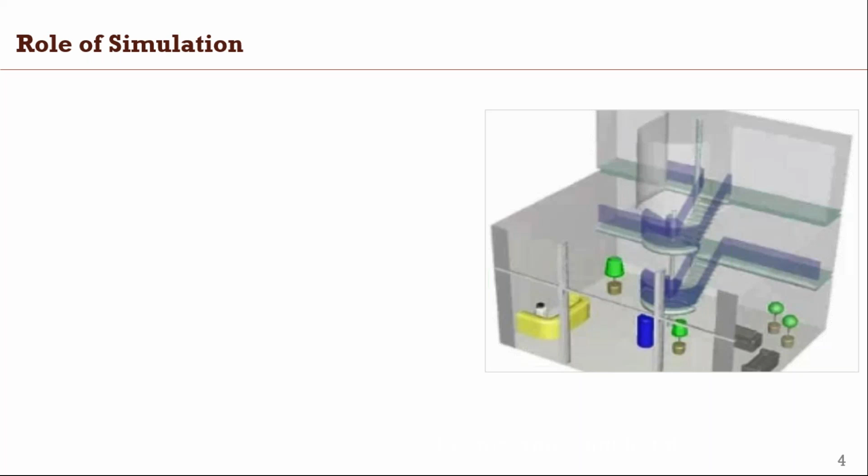So if you can see from the figure, there is a room in which a fire breaks out because of some reason, and everywhere there is smoke.

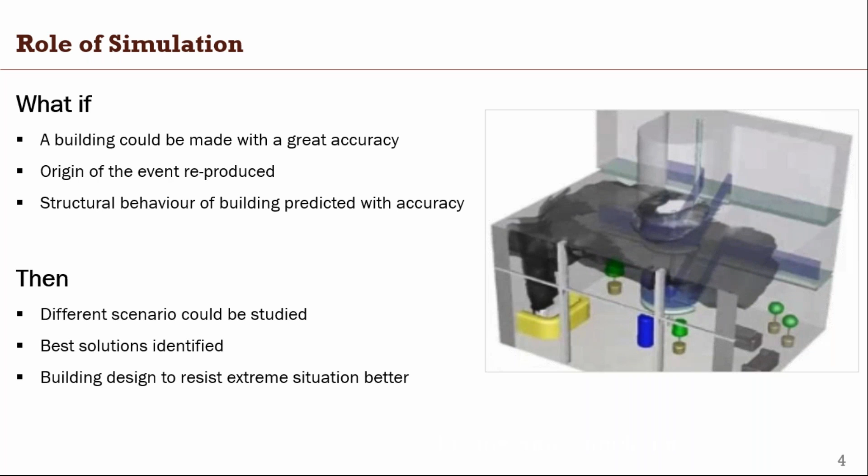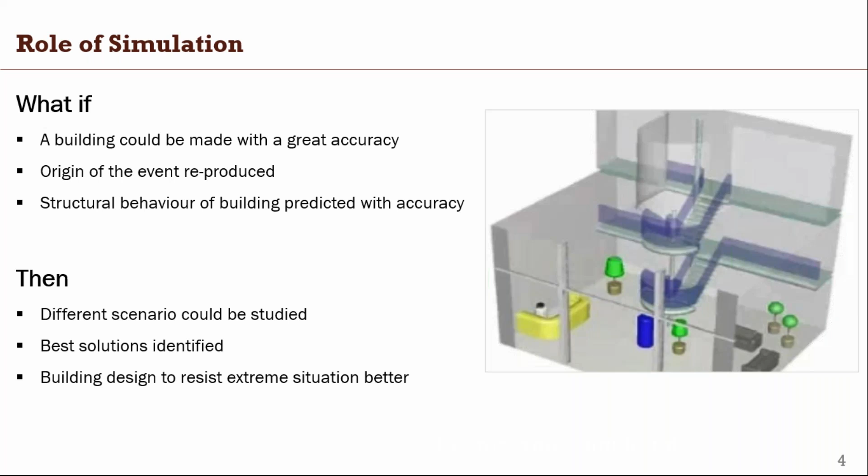So what if a building could be made with great accuracy, and the origin of the event reproduced and structural behavior of building predicted with accuracy? If this can be done, then different scenarios could be studied, best solution identified, and building designed to resist extreme situations better. This could be done only with engineering simulation. So that's the role of simulation in our life.

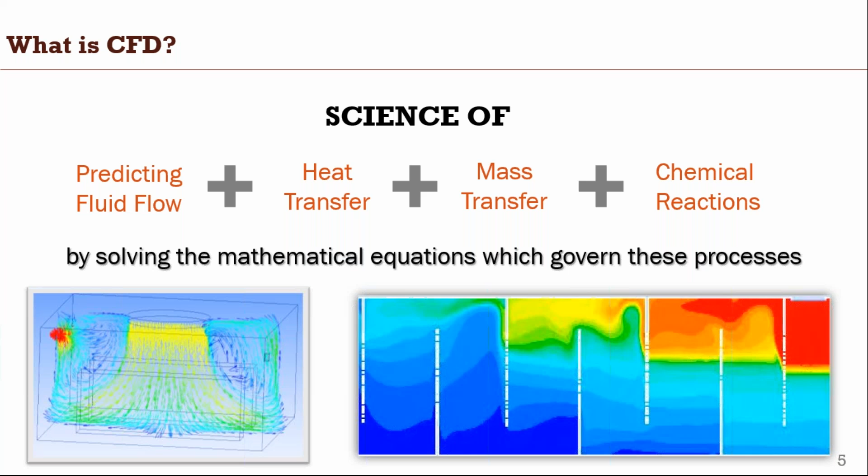So what is CFD? CFD is basically a science of predicting fluid flow, heat transfer, mass transfer equations, chemical reactions, and all of these equations we solve the mathematical equations which govern these processes, and that's what CFD is. I'm not going into technical details, but CFD is a virtual experiment.

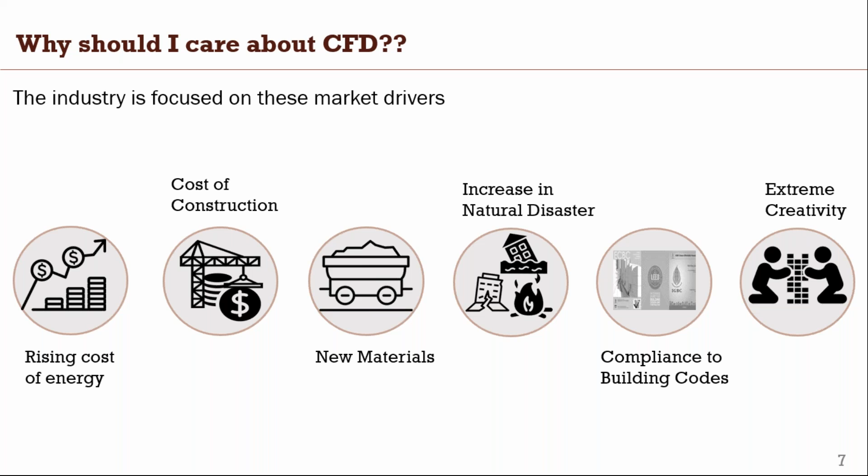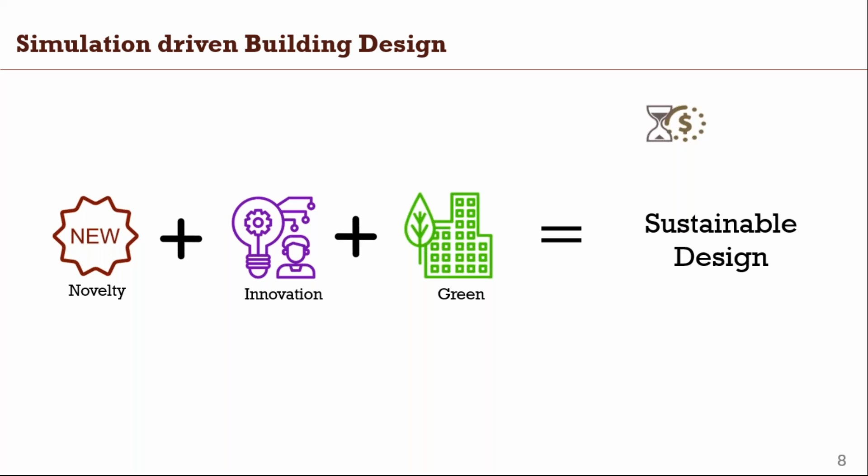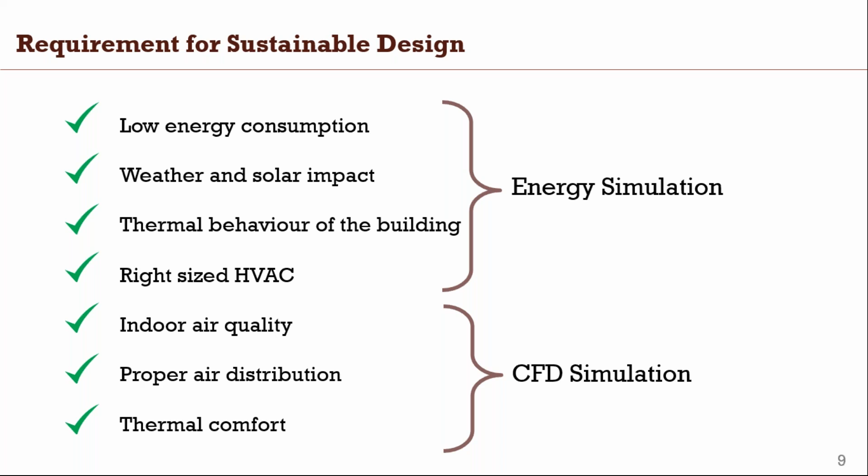So what is the requirement for sustainable design? Low energy consumption, weather and solar impact, thermal behavior of the building, right sizing of HVAC. These four factors can be covered with energy simulation, but the other three - indoor air quality, proper air distribution, and thermal comfort of the building - these three factors can only be catered with the help of CFD simulation.

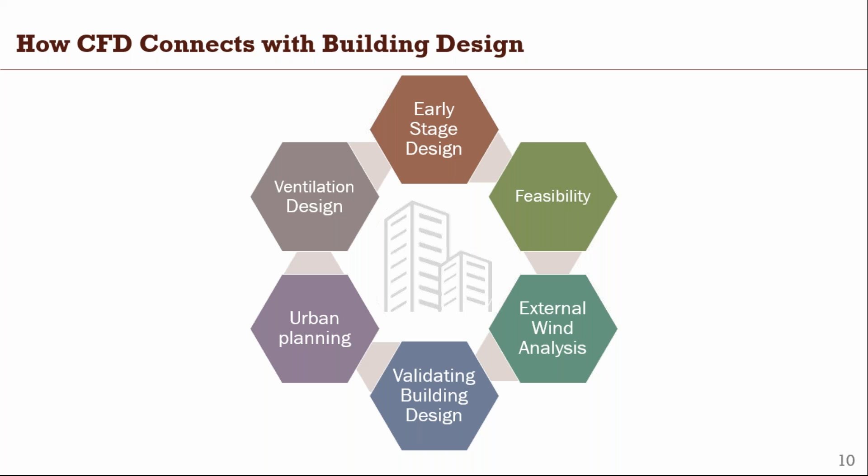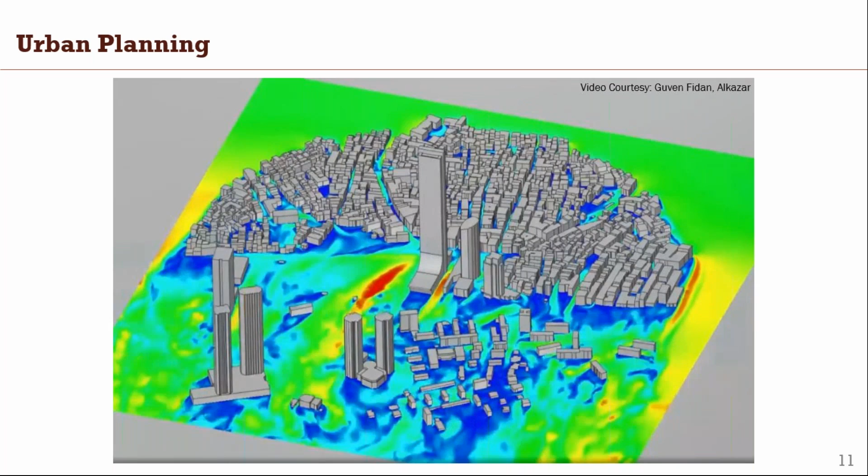So I'll take an example of urban planning. If you can see the video, this is a real example of a city situated in Israel. There are few corners where very fast wind drags you - it literally drags you from one place to another place in winter season. And plus there are some chilly winds that come from the north.

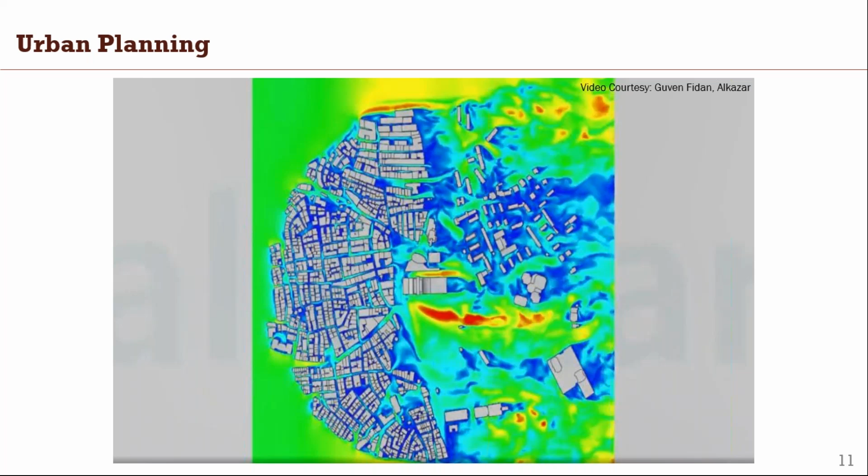So the impact of wind is undeniable, but the height of the tower is also an important factor to increase the wind velocity, as can be seen from the figure. The city planners are working to come up with a solution, but over time they have learned that acceptance is the most important parameter for this kind of planning. So that's where CFD plays a major role in urban planning.

So early stage design is one of the processes. Right now, if I'm talking about a few years before, 10 years before, the design process was traditional, where all the architects and engineer community had typical thinking, and once the drawing had been finalized, then the engineer got the design and started the work. But right now the integrated design process is coming, which collaborates architects and engineers up to a level, so that some design changes can be performed before the design is finalized.

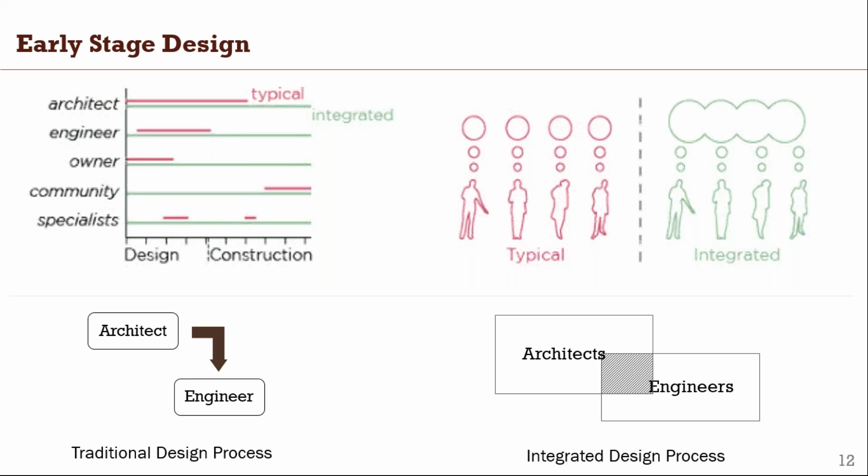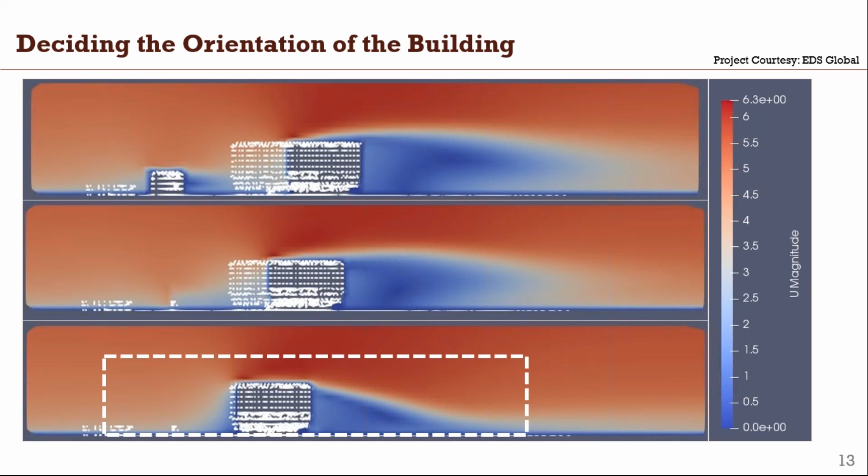So one example of this is deciding the orientation of the building. You can see these three figures - the orientation of the building has been changed and the CFD simulation has been done. If you can see the last image, the wind pressure is very less for this orientation compared to the other two buildings, so the pedestrian will feel less draft of the air near the building. So this is how CFD helped decide the orientation of the building.

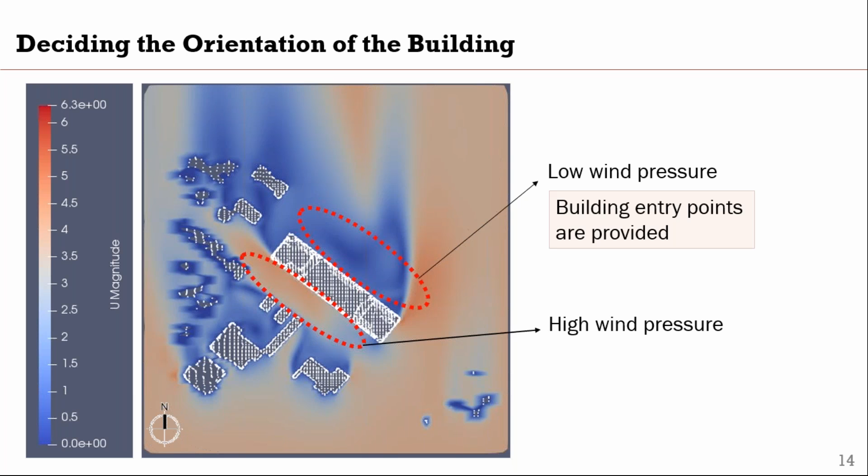So again, in this, after CFD simulation, it has been found that there is a high wind pressure. Basically in the real scenario, this is a road and this is where the entry of the building was expected. But after simulation, it was found that there is high wind pressure in this area and low wind pressure in the back side of the building. So some design changes were implemented - where the low wind pressure was, building entry points were provided, and for the high wind pressure, a tree buffer can be provided to reduce the effect of the wind.

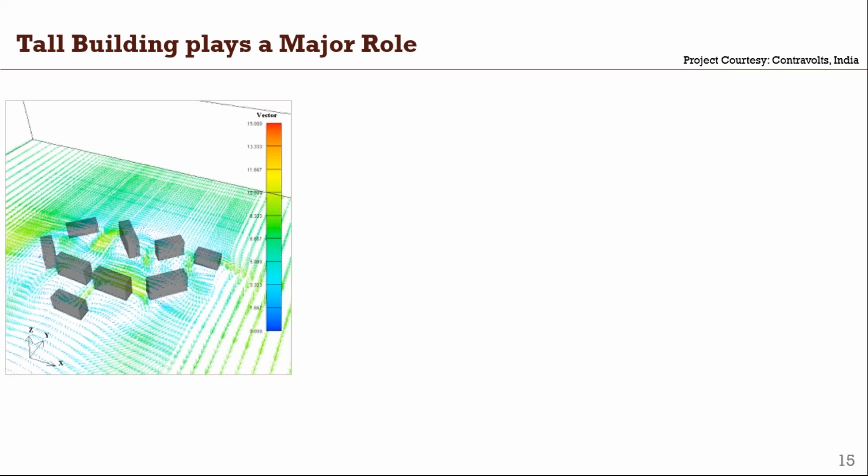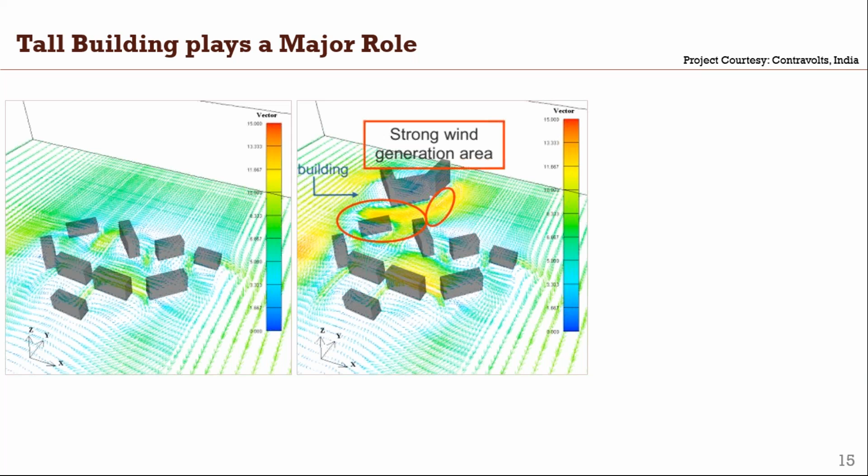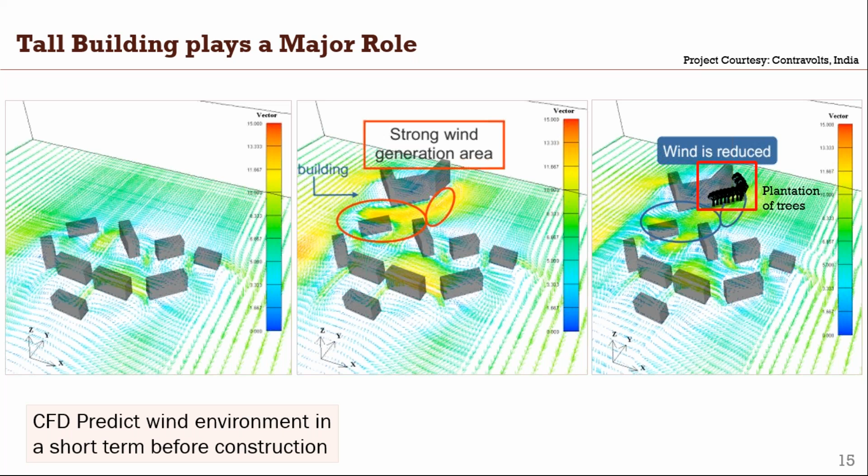CFD can also play a major role in building design for naturally ventilated buildings with comfort and proper ventilation. A building was studied with different natural ventilation strategies like single side ventilation and cross ventilation to study the effect and finalize the location of the window.

You can see the CFD model. This building had 4 floors and is a residential complex. A sandwich structure of the floor has been studied because of the symmetry.

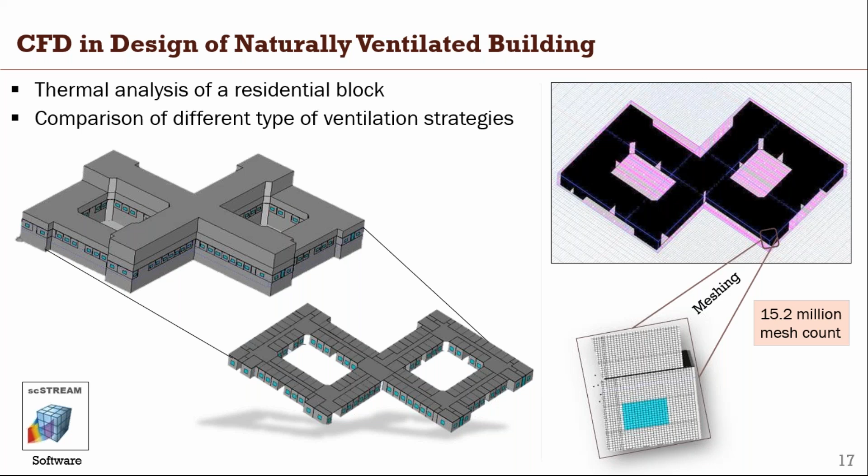These are the temperature representations for two different cases. The left one is single side ventilation while the right one is cross ventilation. The right hand figure has better ventilation compared to the other because of the proper flow of air from one side to another.

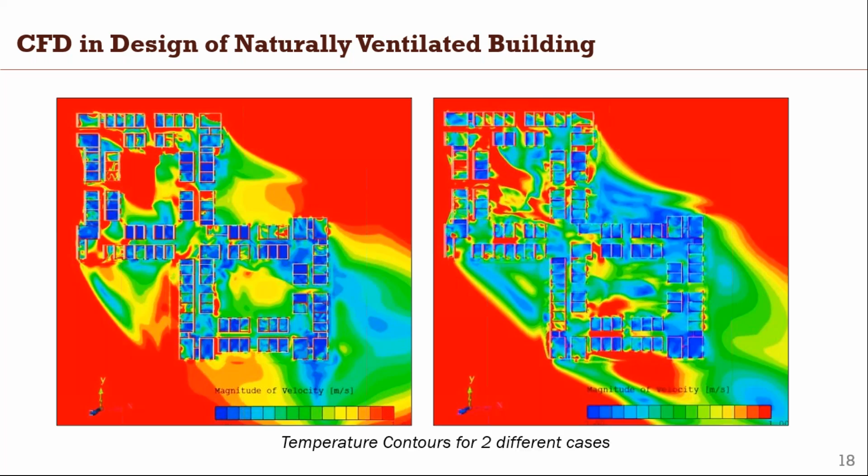This is the velocity vector for single side ventilation on the left. CFD predicts the location of windows for maximum air change in less time. On the right, cross ventilation is happening where the window height and position is finalized after iterations to check the maximum airflow or maximum ACH. That's where CFD can help in natural ventilation design.

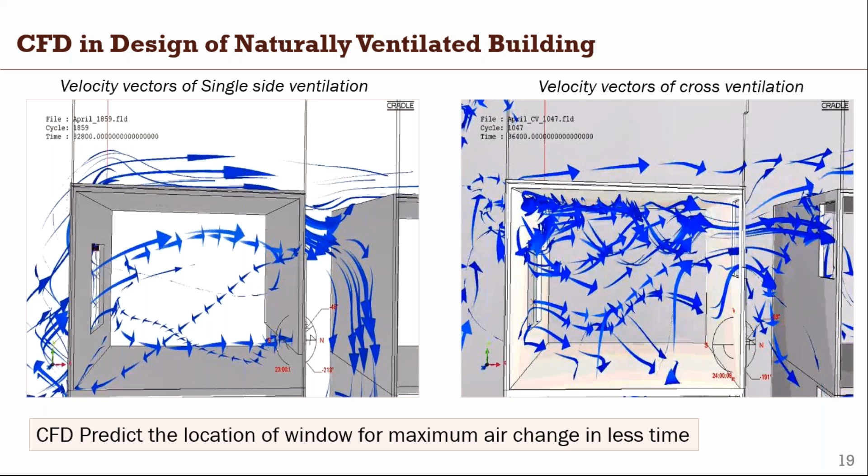An integrated approach shows how decisions can be made. For identification of cold and hot spots, the CFD simulation expert tells the architect where these spots are, so the architect can plant a tree or add water bodies near it to reduce the urban heat island effect and reduce the cold or hot spot.

Another factor is wind impact on pedestrians. If the wind is too low or too high, the architect can change the orientation, and if planning for the city, he can change the building orientation and location to have a good impact on pedestrians.

Wind impact on tall buildings is a factor usually ignored, but if a building is very tall and wind is very high, the impact on top floors is significant. If we can simulate this, a stable structure to withstand the wind pressure can be provided on the top floors. It also helps in natural ventilation, so window placement can be changed accordingly to check the ACH. That's where building design works.

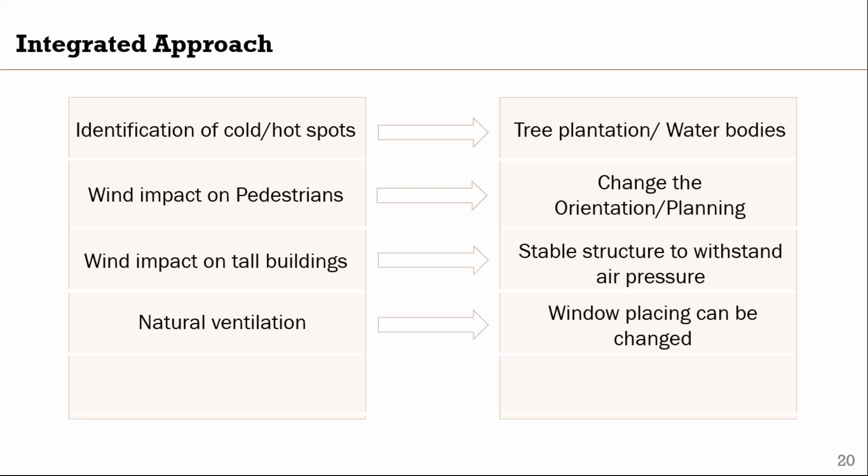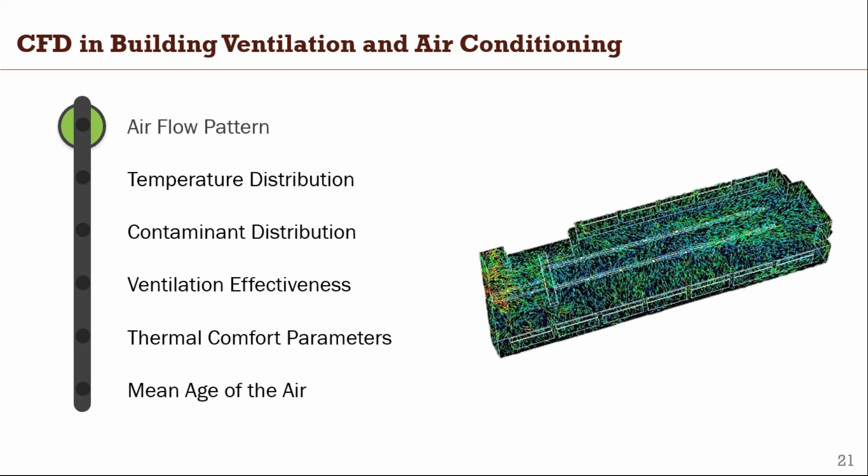Now CFD also works for building ventilation and air conditioning, or you can say in the built environment. There are several factors in which CFD can play a major role. First is airflow pattern, which I'm explaining with case studies.

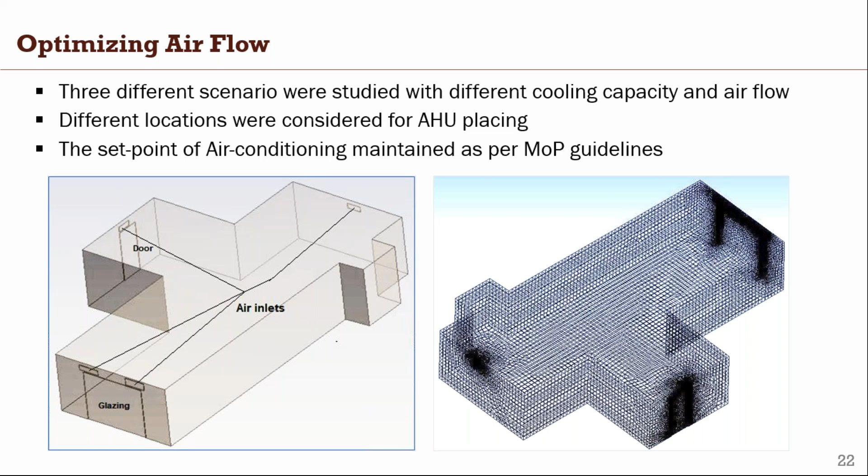For airflow pattern, you can optimize airflow. This is a room or hall of a house. Three different scenarios were studied with different cooling capacity and airflow to optimize it. Different locations were considered for the AHU, and the set point of air conditioning maintained as per MOP guidelines, which is 24 degrees. These are the three cases showing temperature contours.

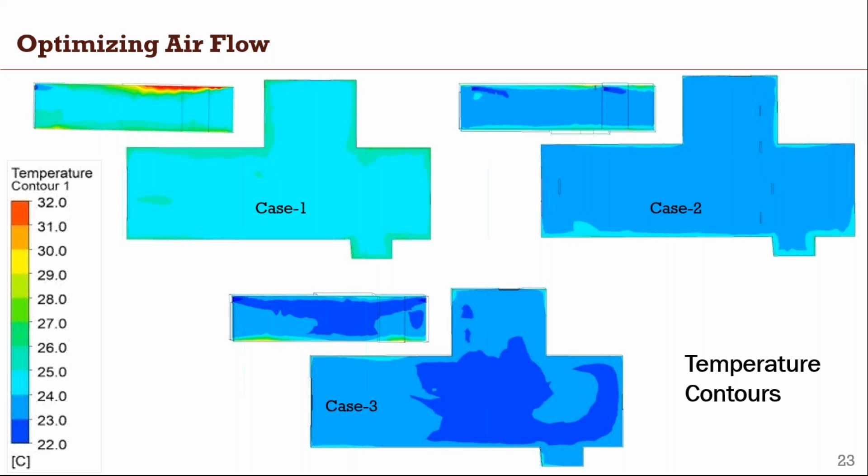In the first case, temperature varies around 24 to 25 degrees, while in cases 2 and 3 it's less, as I'll show in the next slide. This is the air velocity vector. In case 1 there are 4 diffusers from which velocity is flowing.

In case 2, the location of the diffuser has been changed, and you can see the effect. In another case, the diffuser's location and number of diffusers have been changed.

Case 3 has the lowest airflow speed at 1 meter height level, which is the standard height, so the occupant does not feel cold or any draft of cold air. So case 3 was the best possible case for optimizing the airflow for occupant comfort.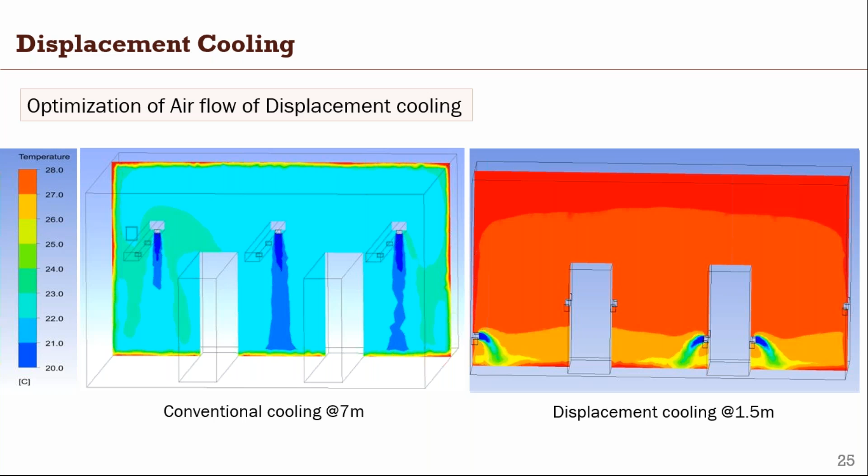Different scenarios were considered with reducing the airflow rates. We can see these are the different airflow velocities varying from 1 meter per second, then 0.8, 0.6, 0.4, and even 0.2. This is a representation of the airflow for different cases.

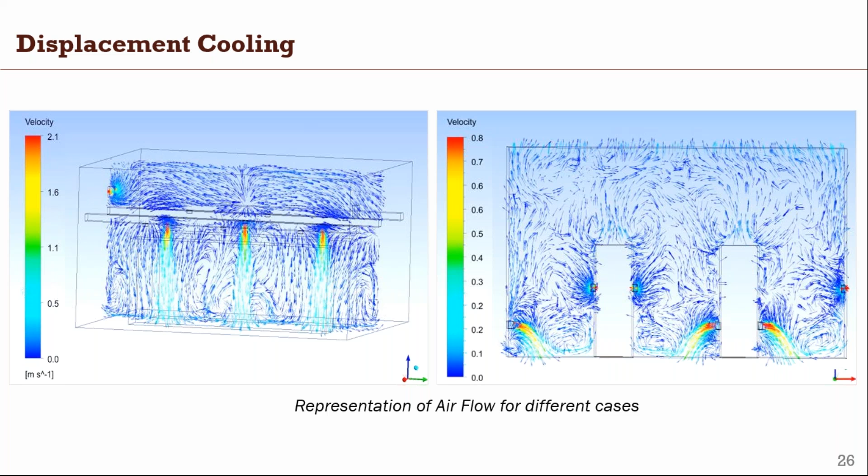It has been found that if 1 meter per second velocity is flowing through the displacement cooling, then the occupant will feel draft. I'm not showing all of the results here, but you can see from the video that the supply duct is at 7 meter and the standard velocity is 2 meter per second.

The second case is 0.8 meter per second. So in general, it's a model of a store, a supermarket store. Generally at the upper height we don't require cooling, but in conventional cooling the complete room gets cooled, so there is a wastage of energy. That's why we use displacement cooling, where only the adequate height, like 2 meter or 3 meter, gets cooled, and the upper portion doesn't require cooling. So that's where displacement cooling works.

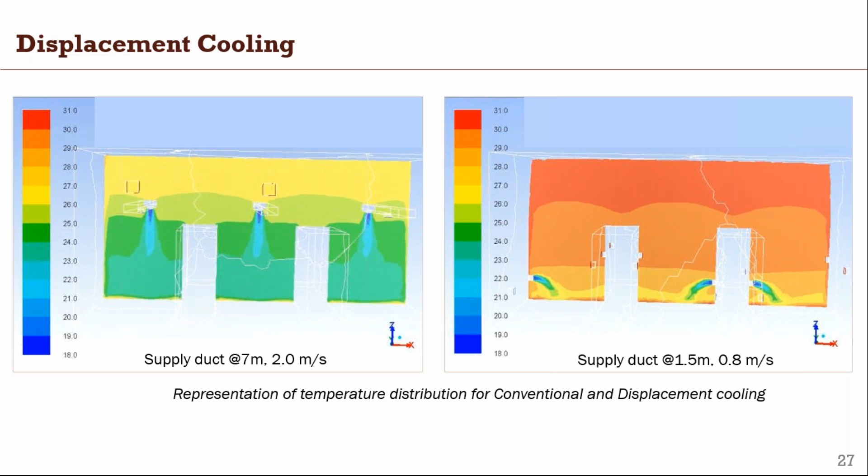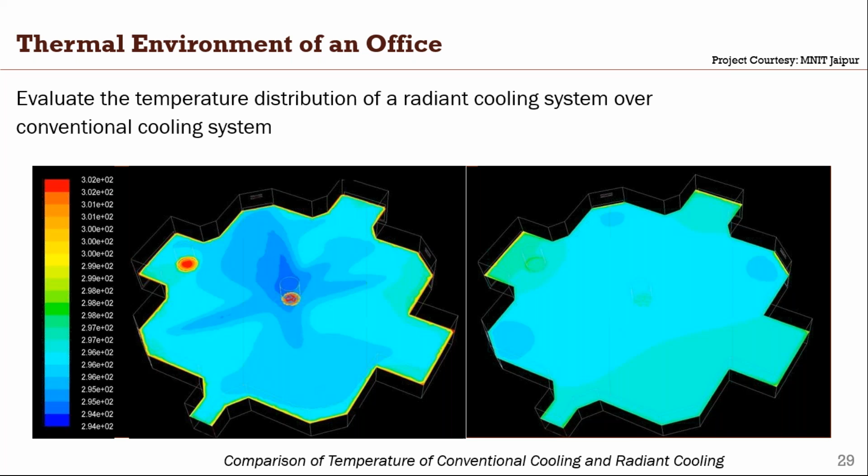So the spatial distribution of temperature for both cases has been determined. Spatial distribution is basically air temperature according to height. You can see for the conventional case, the distribution is more scattered in range, but for radiant cooling, the mean air temperature range was within comfortable limits. So we can say that with this kind of cooling, meaning radiant cooling, with this temperature and this airflow, people will feel more comfortable.

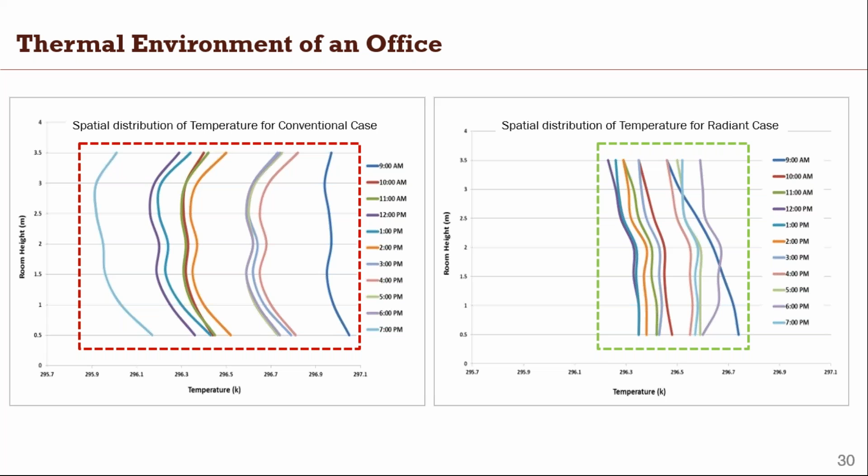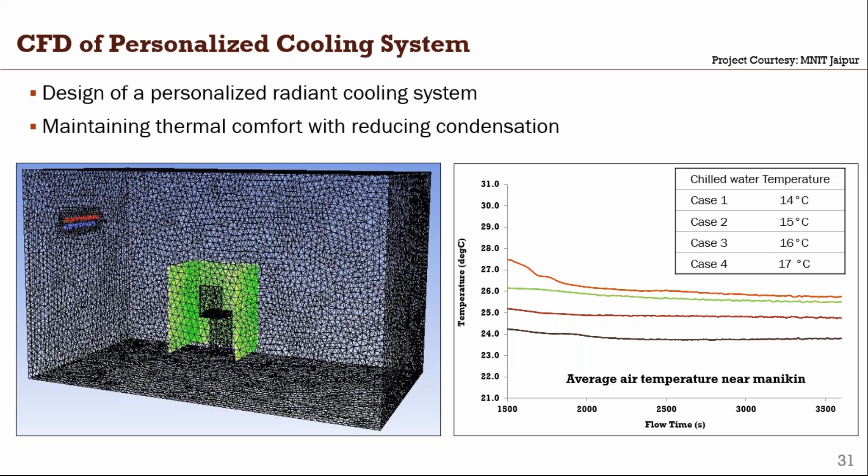These are some temperature representations, and from the temperature data it was found that the chilled water temperature for this personalized radiant cooling system can be increased up to 16 degrees centigrade. In conventional cooling, it's around 7 to 8 degrees. So there is a lot of delta T, and thus savings can be achieved.

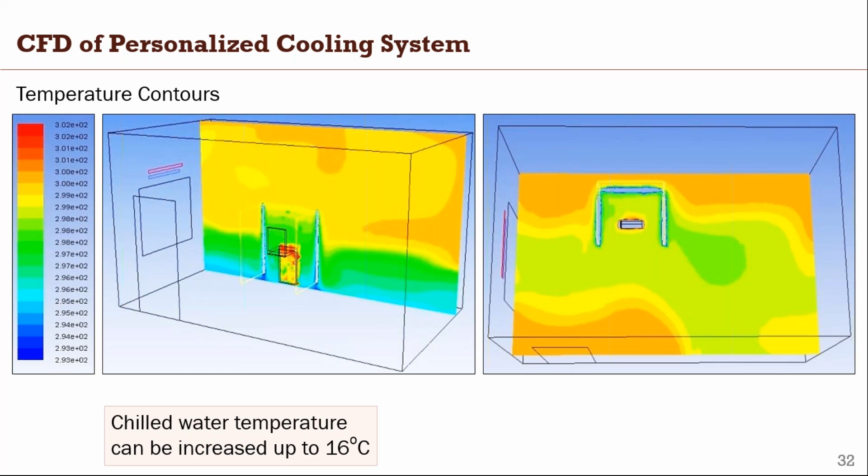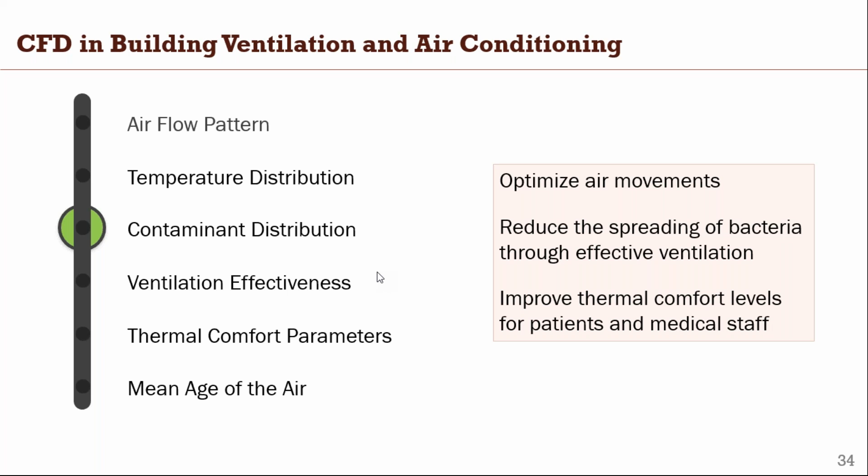So what can CFD do in a healthcare facility? It can simulate dust contamination. There are two cases, one with a single diffuser and one with 4 diffusers in a doctor's room. This simulation has been performed at human height, 30 seconds after door closure. So this is the dust concentration after 30 seconds.

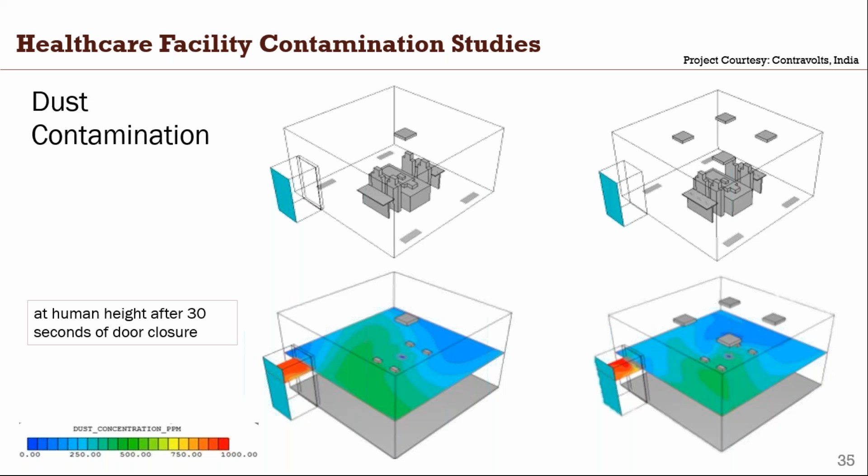Another case is viral contamination from a patient. This can also be simulated through CFD, and you can see the results at the center of the patient's body after 30 seconds of door closure. You can see that option 1, with only one diffuser, is better in this case, because in the other case the diffuser is placed just above the head of the person sitting there.

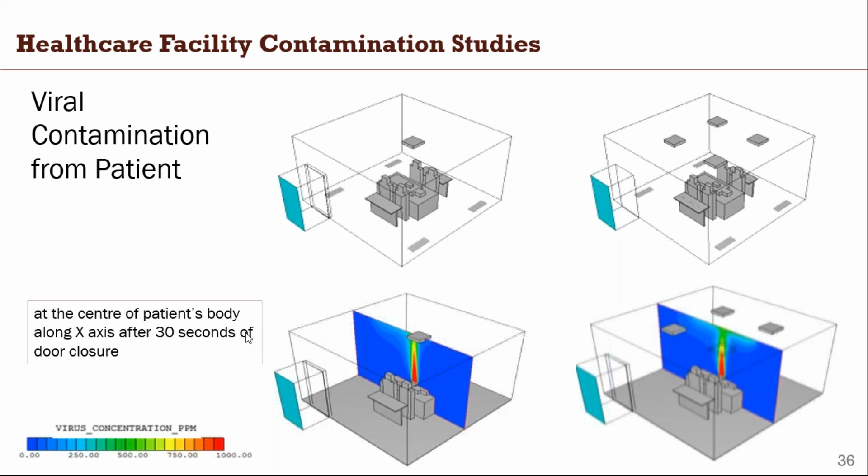Skin flake contamination can also be studied with CFD. Skin flakes are basically particles that can be removed if a person is sick or has some condition. So this type of simulation can also be done.

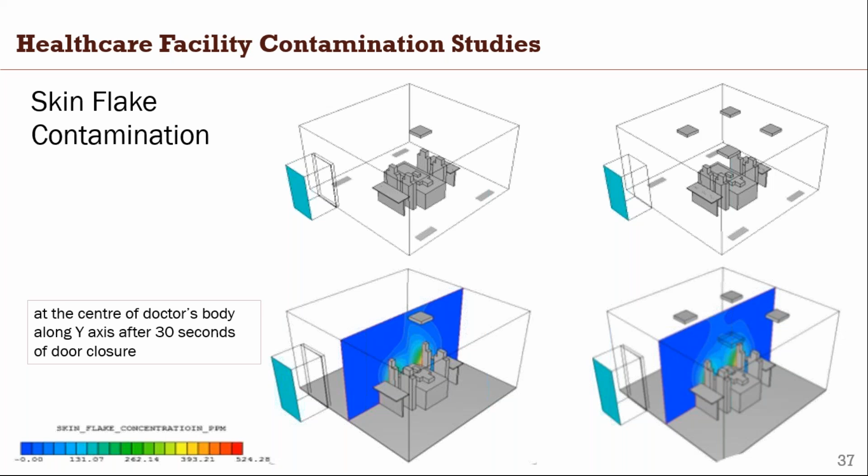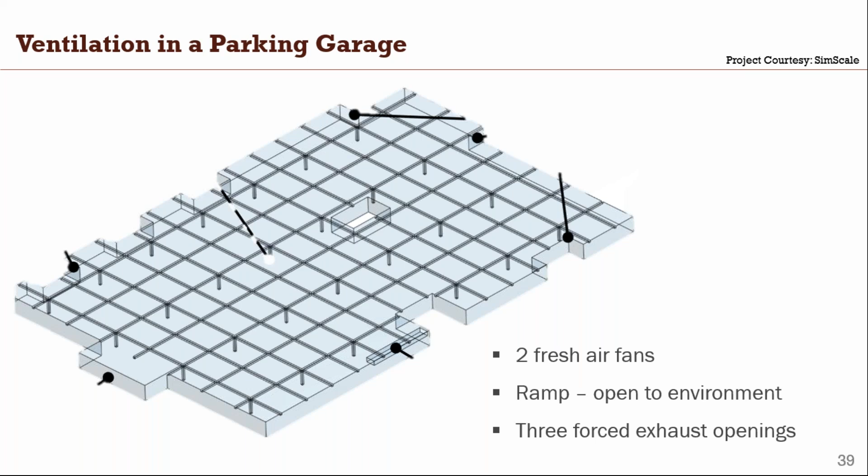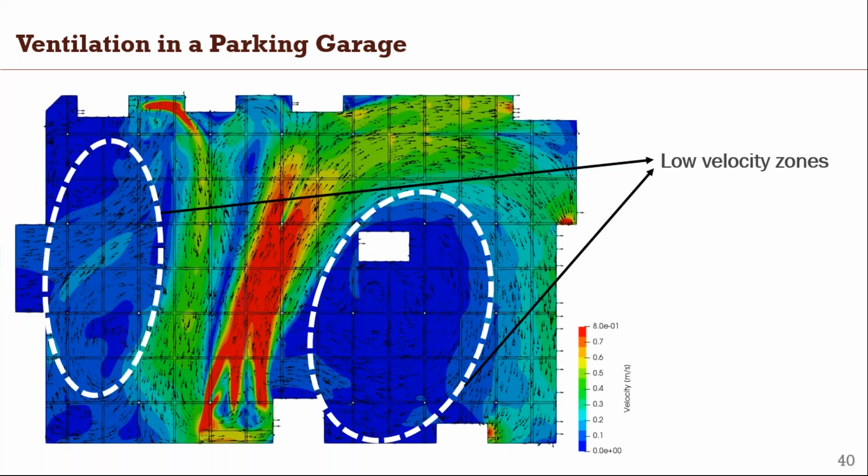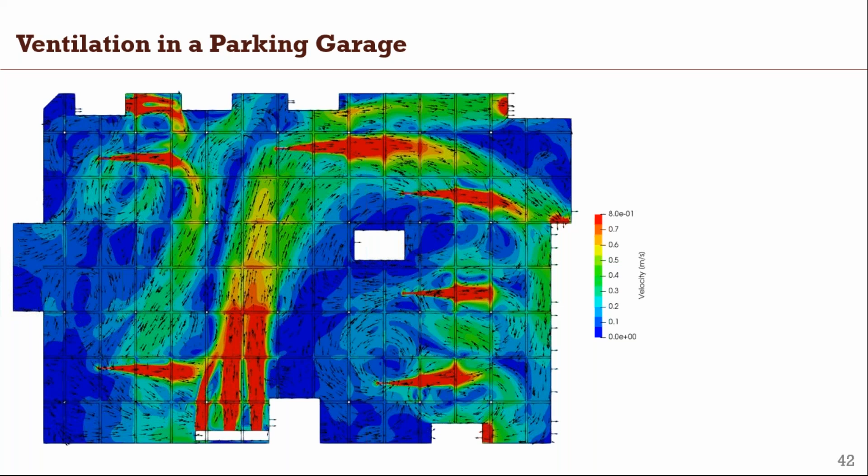Ventilation effectiveness is another major parameter. This is a case of ventilation in a parking garage, where we have installed two fresh air fans, one ramp open to the environment, and 3 exhausts. We did the CFD study and you can clearly see two low velocity zones, where air is not flowing properly. To increase the velocity distribution, we placed jet fans at different angles and distances, and now the airflow velocity has improved compared to before. That's how ventilation in a garage works.

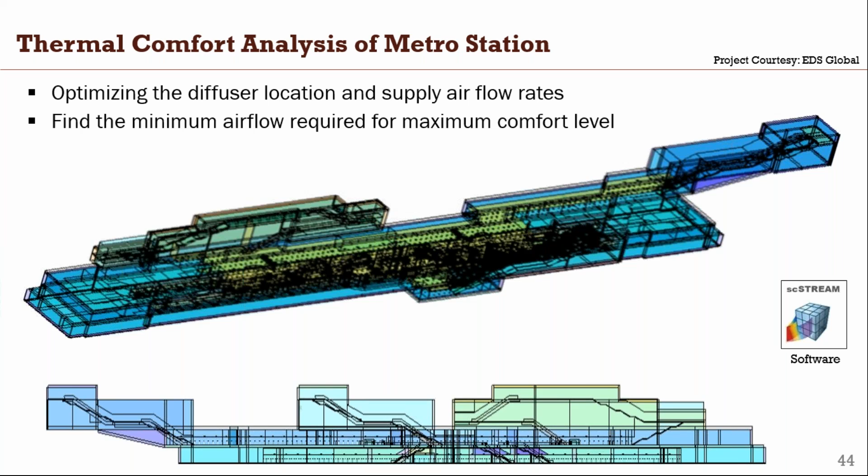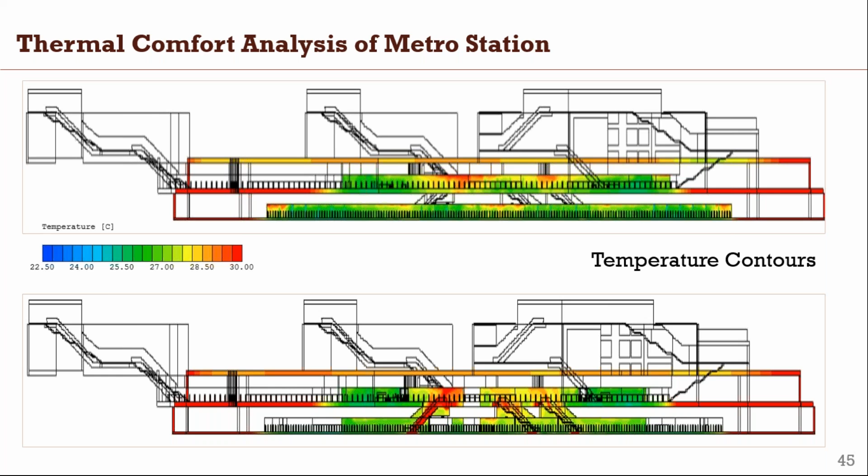Here you can see the temperature contours of the whole building. It's not very easy to understand since I've shown the contour for the whole area, but it gives some idea. This is the airflow velocity vector, showing the path of the air in a section representation of the station.

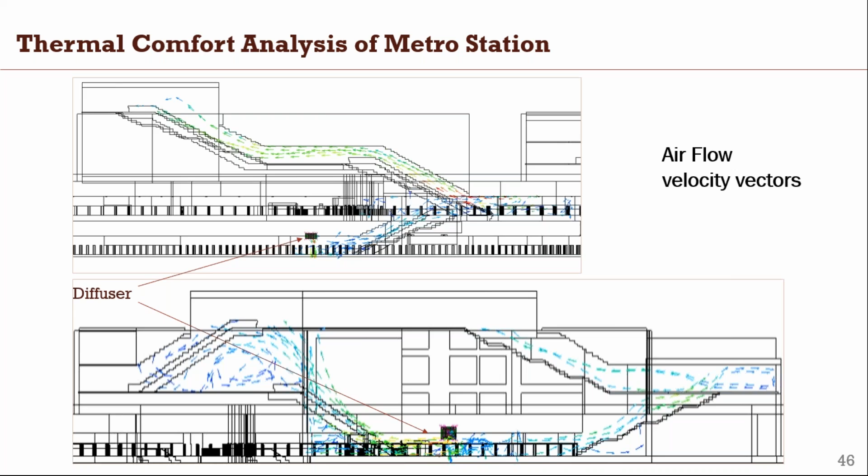The important part is PMV and PPD. This is a PMV contour. The airflow and diffuser locations have been optimized so that the PMV level is maintained within the thermal comfort limit, for both the concourse and platform levels. The black dots you see represent the people considered for the simulation.

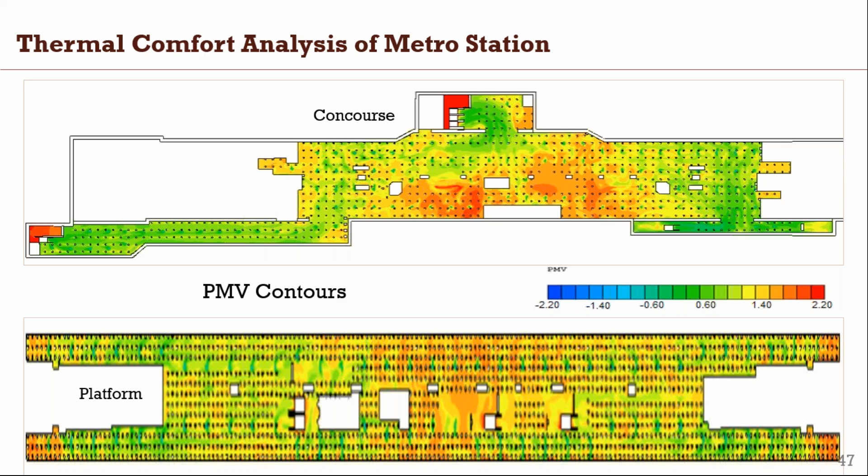Last one: mean age of air, which can be found from CFD. Mean age is a significant indicator of the freshness of air in a room, showing how air coming from outside is changing over time. It is very important in hospitals and ICU facilities, so that fresh air can circulate as quickly as possible. It's also required in natural ventilation studies, and if it's forced ventilation, you can find the air change per hour and select your options accordingly.

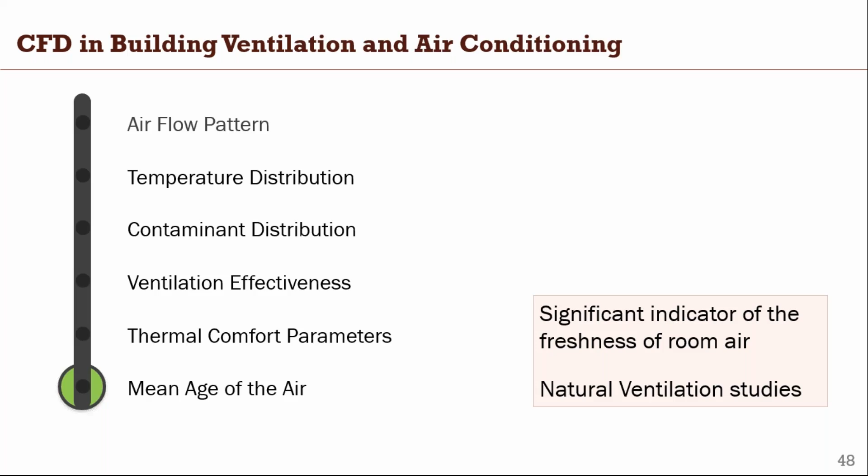So these were some case studies which showed how CFD can help in the decision making process in building design and HVAC design for built environment.

Now I want to show some basic fundamentals of CFD, including the steps and some best practices which should be performed for simulation. So basically the CFD process simulation.

First one is problem formulation, where you first gather the information: what kind of CFD you want, internal or external, or the parameters. Then is your flow turbulent or laminar? What are the specific goals to your problem? What do you want to achieve? So that's the first step of CFD process, which is formulation.

The second is mathematical formulation or equation, in which you decide the flow model, the turbulence model, whether it will be RANS, K omega, or K epsilon, depending on the properties you want to simulate. And the computational domain or the boundary of your domain. So you have to decide first what will be your domain boundary. And governing equations like mass, momentum, energy - CFD works on these three equations.

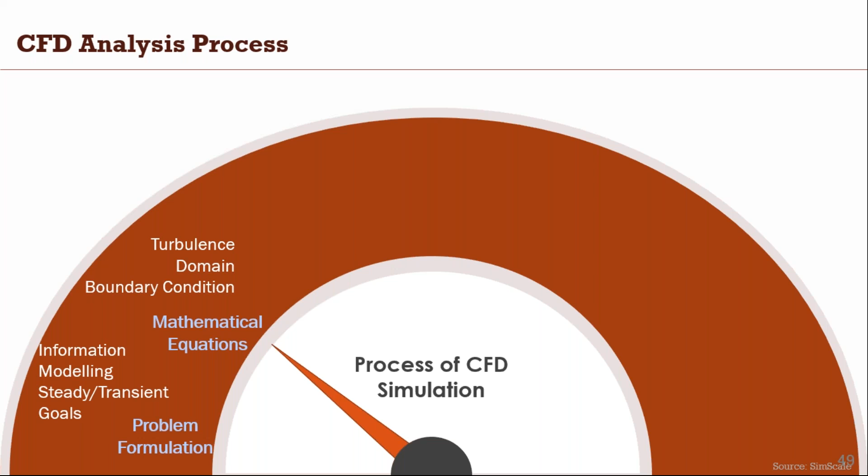And then you can simplify your equations - if you are doing some simulation and the results can be seen from the 2D simulation, then you need not do a 3D simulation, which takes more time. So you have to decide the second step.

Third one is discretization. Discretization is basically meshing of the object. Meshing plays a very important role in CFD. I will cover it later.

And the pressure velocity coupling - how it couples with the pressure and velocity, which model you are using, like which approach - FDM or FVM. This approach decides which software you should go with. And the time scheme, whether it's explicit or implicit.

Another step is iterative solution, where you see the method of convergence, the equation balancing - how the equation can balance - and you give input to the solver, and there are some factors which can be ignored in some kinds of simulation. I'm covering very basic detail. I'm not going very much into it, so just keep it with me.

Next step is simulation run. So you have to decide the time step and the maximum iteration in a time step to reduce errors, so that your result can be quick and accurate.

Next one is post processing, which is also important, like contours or animations - how you represent the results.

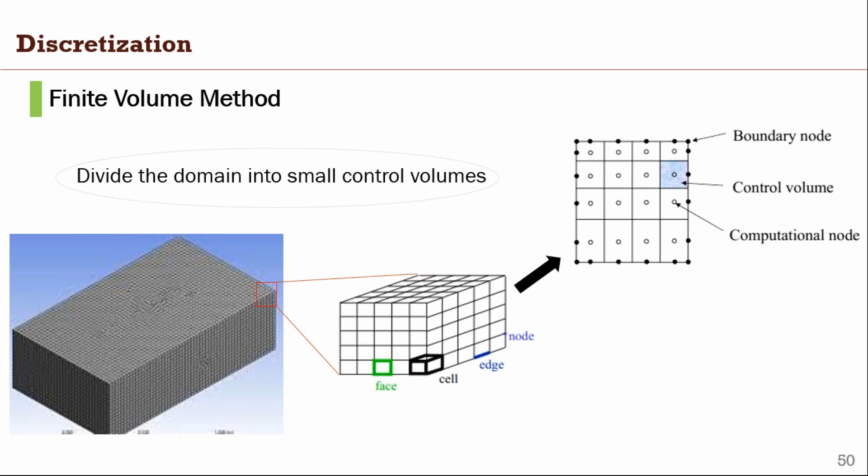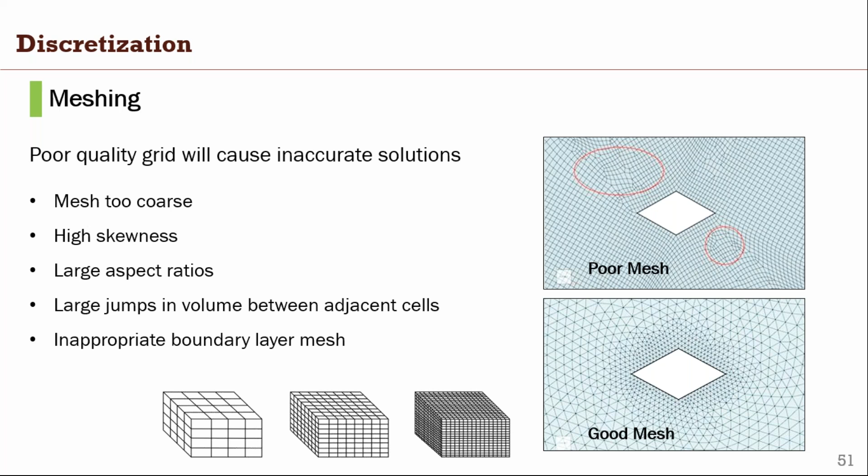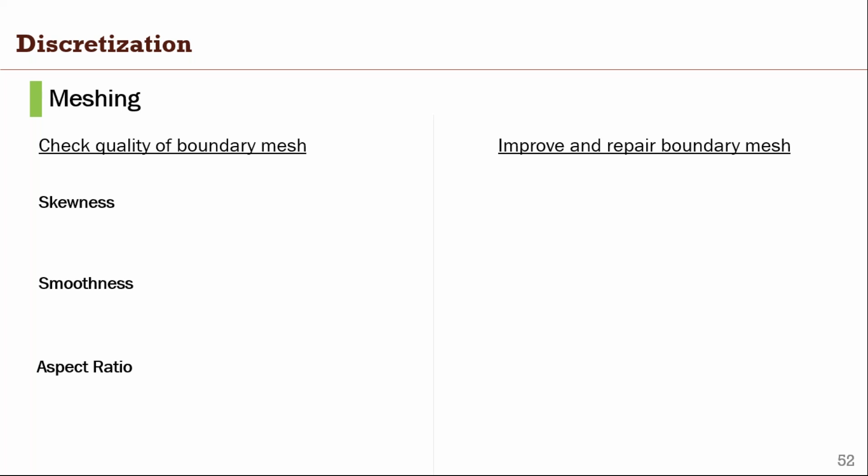Skewness is how the mesh is skewed from the corners or where the geometry is uneven. If your skewness is towards 0, then it will be best. But generally, if you try to reduce the skewness, then your number of cells increases a lot.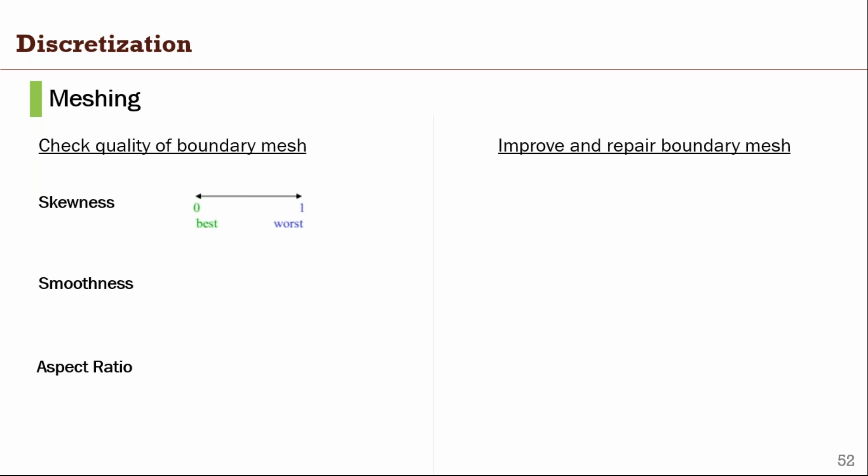So try to keep it towards 0, but it's not mandatory. Smoothness is the change in cell size, how the cell size is changing. If there is a large jump in cell size, the CFD simulation will show error or the result will not be accurate. So there should be a uniform growth rate.

Sometimes the domain is too large and we don't need refined cells. For example, in external CFD, the domain is very large. We take an environment as a domain with some 100 meter or 150 meter from above and left or right side. So it's not required to have a very refined mesh because this is of no use. You can increase the mesh size, but the increase should be very smooth.

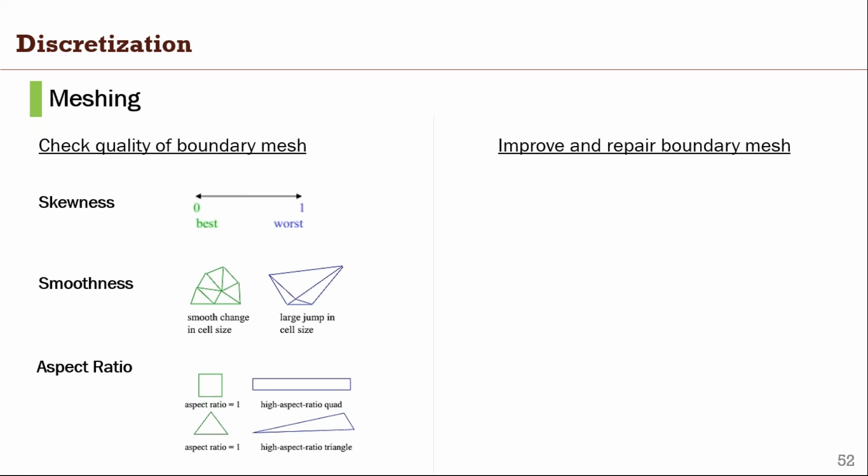Another one is aspect ratio. Aspect ratio is the ratio of the longest edge of your mesh divided by the shortest edge of your mesh. So if the aspect ratio is 1, it means the mesh is perfect. In standard practice, we keep aspect ratio below 5:1.

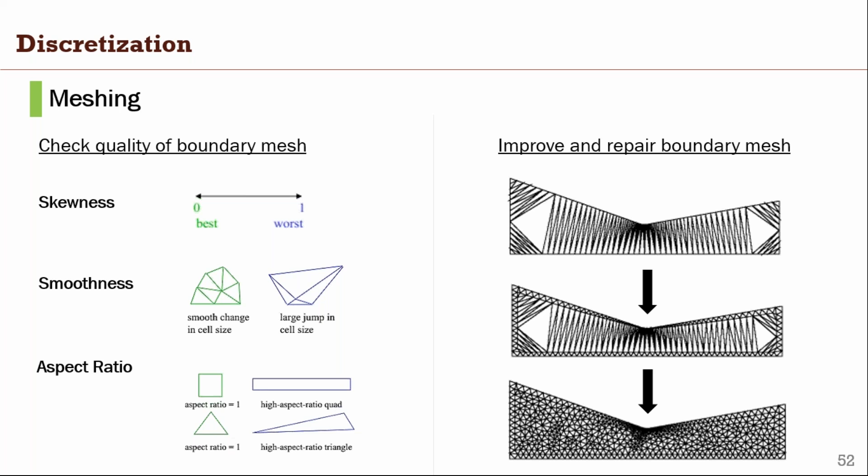There are some processes in which you can improve, check, and repair the boundary mesh. If you first generate the mesh, then you can refine the boundary of your region, which is important. And after refining the boundary, you refine your mesh, so this will be the exact process where you will not get any errors.

Time scheme is also important. There are two schemes: explicit scheme and implicit scheme. You have to decide based on your case properties which scheme you should choose. Explicit is easy to program with only simple calculations performed, but implicit is more difficult and involves many iterations per time step. I'll explain what iteration per time step is.

Suppose you are doing one simulation and you have considered the time step as 1 second. It means in 1 second the equations will calculate and move on to the next second. In iteration per time step, the CFD process depends upon various equations and methods which reduce the errors. So per time step, it takes some parameters and then calculates again, and it calculates till the error reduces. That's called iterations per time step.

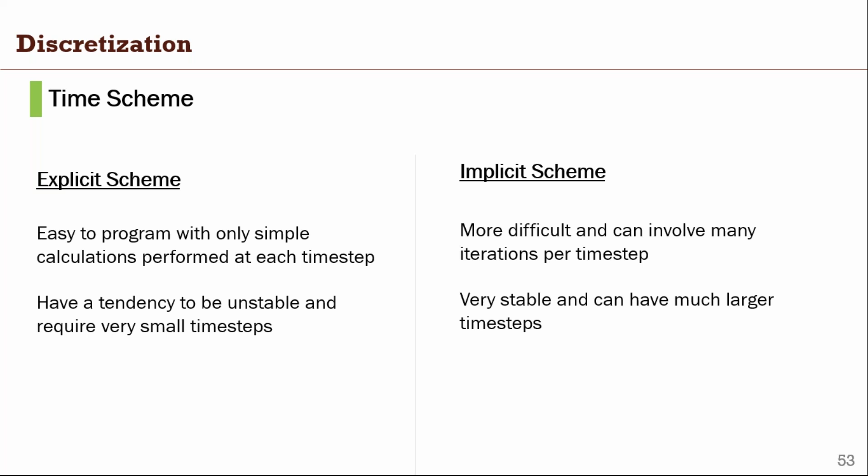In explicit scheme, it has a tendency to be unstable and requires very small time steps because you are using only simple calculations. That's why, if you are using lots of models like multi-phase model or doing some turbulent simulation, it will be unstable. But implicit scheme is very stable, though the problem is it takes a lot of time because one time step considers around 20 to 50 iterations.

The next part is convergence. Convergence is, if you reduce the error, you will get accurate results. It depends upon the judgment of the analyst who is doing the analysis, and the user should know when the analysis has reached its final solution.

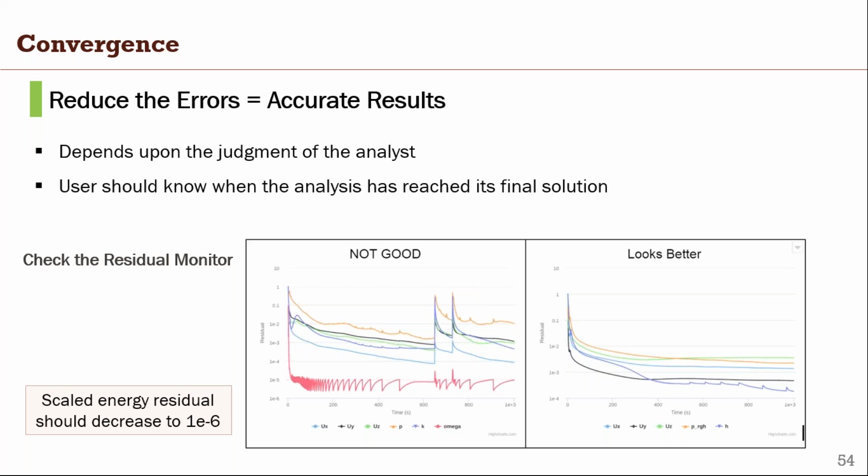The energy residual should decrease up to 10 raised to power minus 6. That's how the error works. 10 raised to power minus 6 is 0.000001.

So there are some inputs which need to be checked before running the simulation to ensure accuracy. Before starting, the user must check that the physical model is appropriate: is your flow turbulent, unsteady, are there any compressibility effects, is the air ideal or compressible.

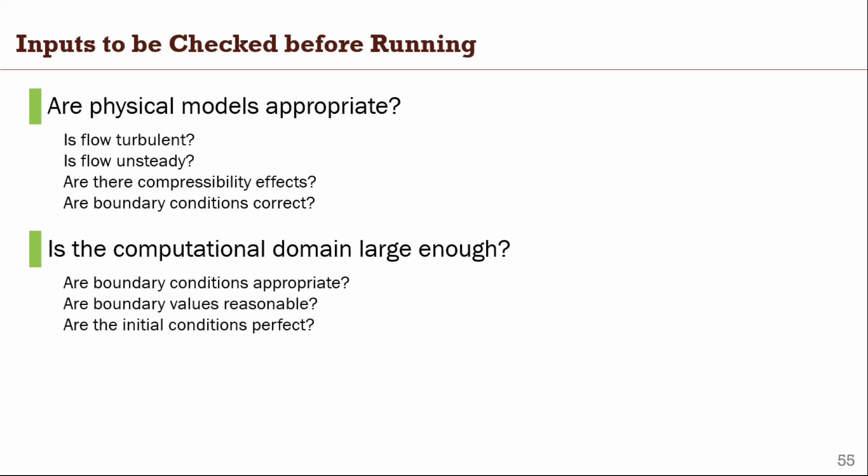Is your computational domain large enough? If you are doing an external simulation and you keep your domain as small as your building size, there will be no effect of wind on the external simulation. So are your boundary conditions appropriate, are your boundary values reasonable, and is your initial condition correct?

Then, is the computational grid accurate? Is your meshing good? It can be refined to improve results, like reducing aspect ratio or skewness factor. Is the solution grid independent? Grid independence means that after a certain point, if you refine the mesh further, the solution won't be affected. That's the stage called grid independence. You need to check if your grid is accurate or grid independent. There are several methods to check grid independence that you can search and find.

Does boundary resolution need to be improved? Sometimes if you are doing internal room analysis, wall shear effect and wall shear stress will be the main impact on airflow. But if you are doing external CFD simulation, this won't matter. So you have to check this before running the simulation.

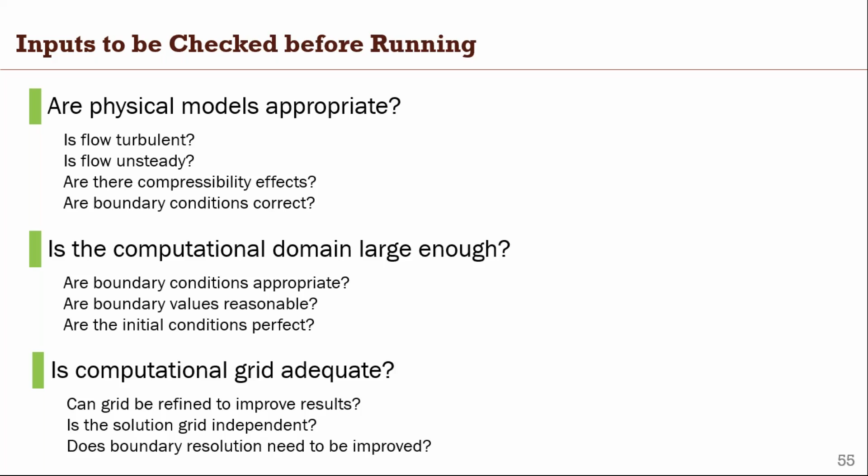Then the final part is post-processing, because visualization is very important. Sometimes clients don't have the knowledge to understand results in the form of graphs. So CFD helps generate results in a form so the client can visualize and see the difference between two or three cases you are showing. So you should know how visualization in different dimensions can affect understanding.

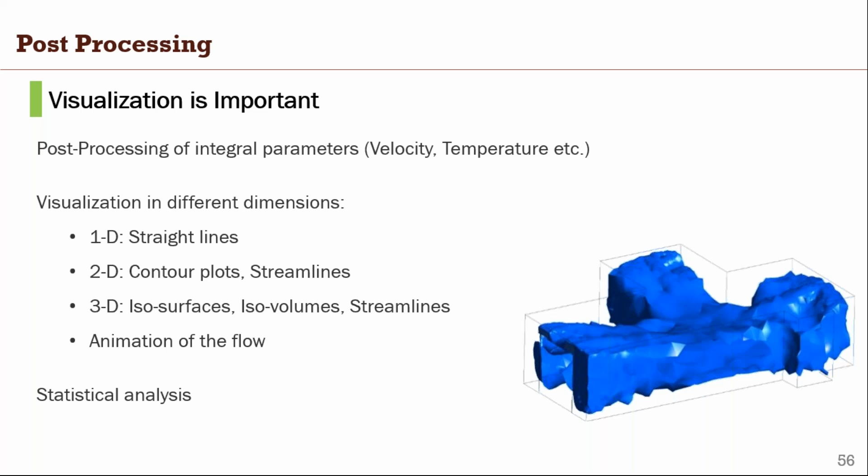So if you show this to the client, they will easily understand what exactly is happening. And if you can produce an animation, it will be good for statistical analysis, which helps with your understanding and finding the accurate result.

Right now there are lots of barriers coming up in CFD, but I've seen over the last few years that we are overcoming these barriers. There are some places where understanding fluid behavior is very critical, and CFD can be the only option available. You have to do CFD, otherwise your building or ventilation design can fail.

So the first thing about CFD is time. There is lots of iteration involved with building design, and it happens so easily that once you've selected a design, the next day you find the design has changed. So if you do the CFD within time, it will be beneficial. There are some software and techniques which do CFD within time.

The second thing is cost. Basically CFD simulation software cost is very high, but these days there are options on a pay-as-you-go basis, because you can't purchase one software and use it for all types of simulation. If you use one software for internal simulation, you can't use it for external - I mean you can, but there are other software available which are better. So you can pay as you go, which reduces your cost.

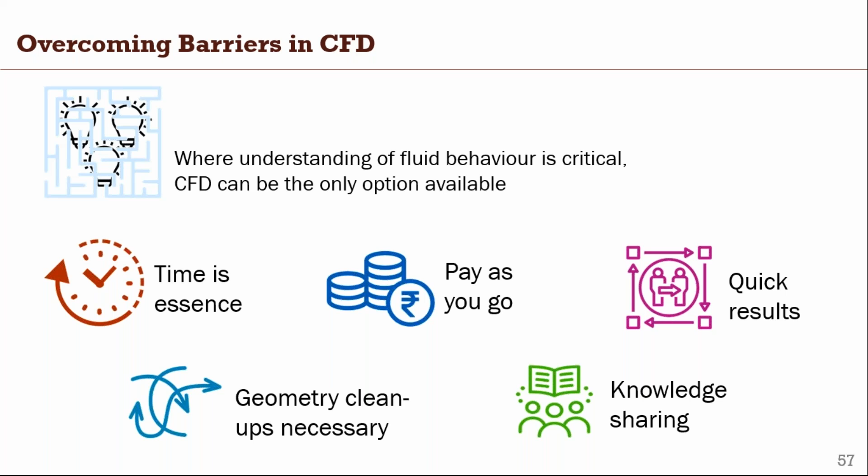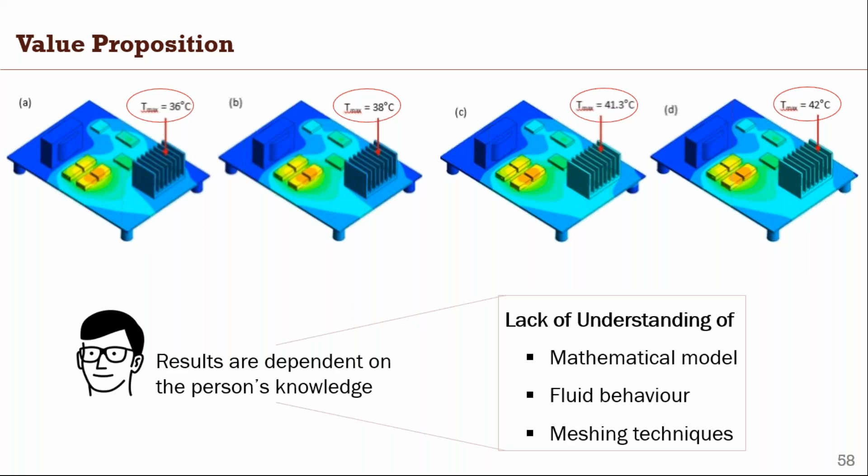There are lots of software available in the market like IES, Cradle, ANSYS, Meteodyne. OpenFOAM is an open source CFD model, and Rhino, Grasshopper can do external CFD very well. There's also Quantum, Design Builder, and SimScale. These are some software you can use for CFD.

As CFD becomes more accessible, architects and engineers have the ability to simulate the flow field around buildings. This could contribute hugely to preparing buildings for natural disasters and reducing repair costs in the wake of such occurrences. Nowadays, engineers are moving to compute airflow patterns and space temperature, resulting in a greater level of accuracy.